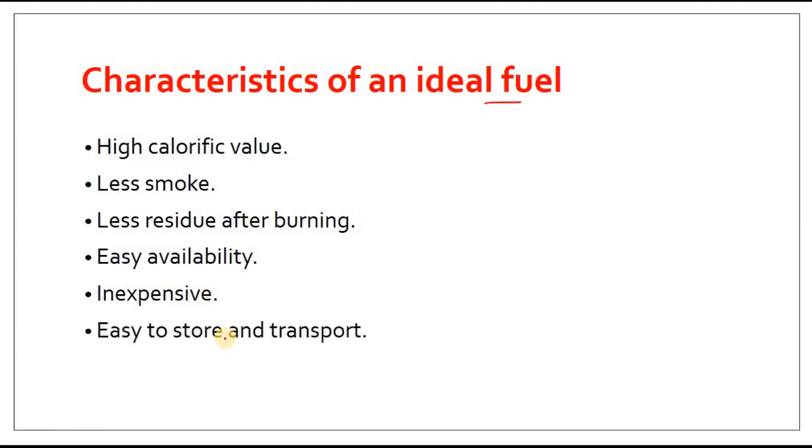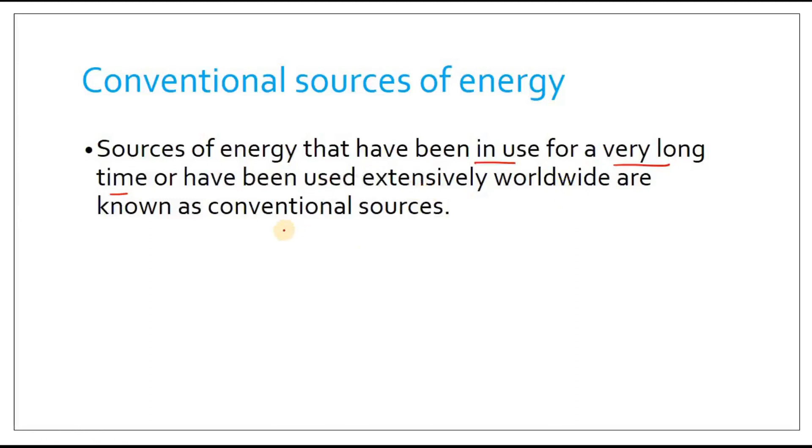Now let us see about some conventional energy sources. Let us talk of the conventional sources of energy, the old or traditional energy sources. The sources of energy that have been in use for a very long time or have been used extensively worldwide are known as the conventional energy sources.

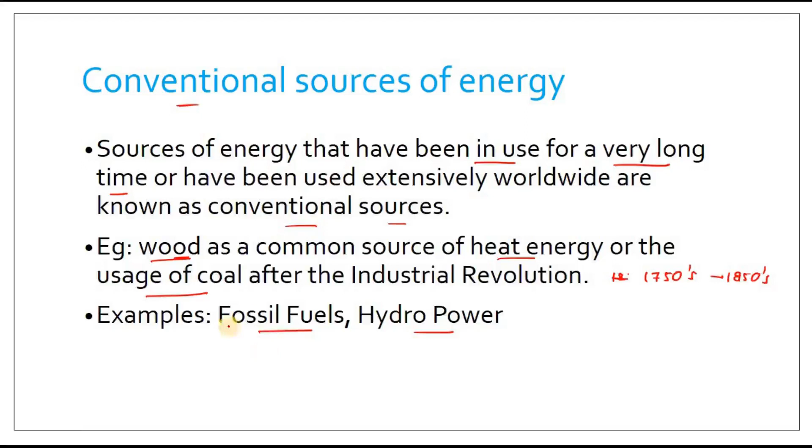For example, wood as a common source of heat energy, or the use of coal after the industrial revolution, which started in the 1750s and reached its peak after the 1850s. Coal is still used, and wood has been used for thousands of years, so these are conventional energy sources. Fossil fuels and hydropower are examples of conventional energy sources. We will see about some of them in this topic.

Let us start with fossil fuels. Fossil fuels are the remains of prehistoric animals and plants which were buried under the earth millions of years ago.

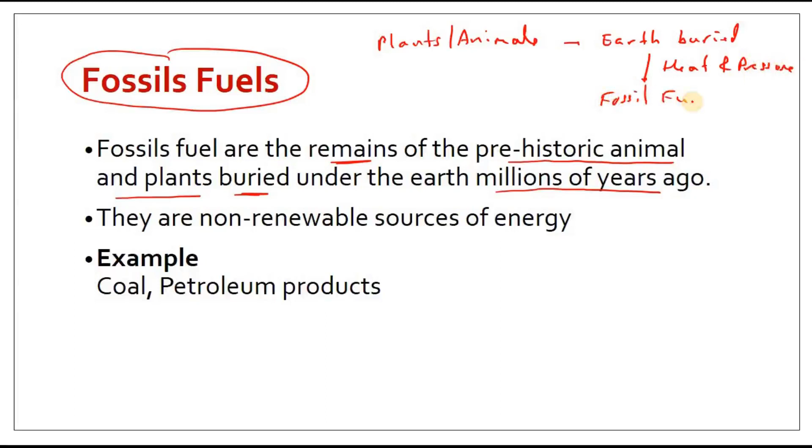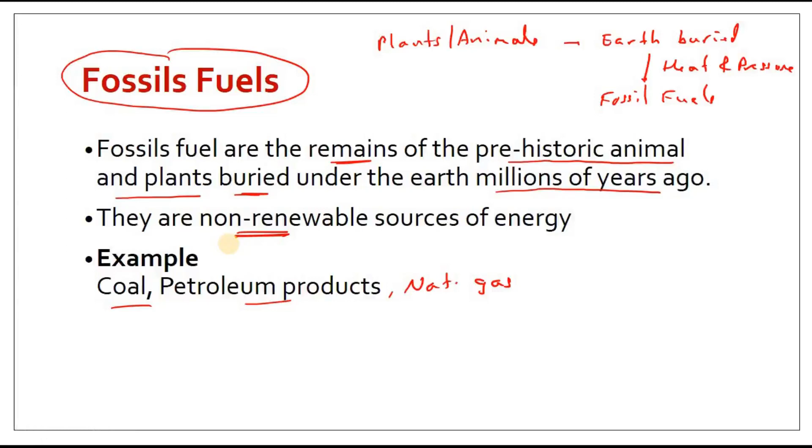So coal, petroleum products, and even natural gas are examples of fossil fuels. All these are non-renewable energy sources because once they are finished, it is very hard to get them again. In the previous video I showed you that coal takes a million years to make, and 1 kilo of coal can be burnt in just 10 minutes. So they are non-renewable energy sources.

What are the advantages and disadvantages of these sources? Let us talk about fossil fuels, starting with the advantages.

They release a very large amount of energy, which can be obtained very cheaply. This is a characteristic of a good fuel - it should be cheap and produce a large amount of energy. Also, transporting them from one place to another is easy.

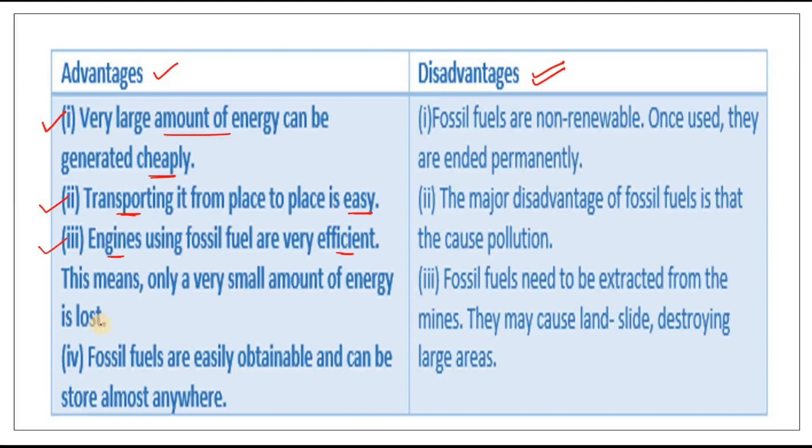Third, engines using fossil fuels are efficient, meaning only a very small amount of energy is lost. Fourth, fossil fuels are easily obtainable and can be stored almost everywhere.

So you see, out of the characteristics of ideal fuels which we saw, fossil fuels tick many boxes, but still we know that they are not so good to use. We have to find alternatives. Why? Let's see some disadvantages.

Number one, they are non-renewable, meaning once used they are ended permanently - that's a big problem, they will end in the next 20-30 years. Second, the major disadvantage of fossil fuels is that they cause pollution. That is the main problem, right? Pollution is the main cause of concern from the use of fossil fuels.

Fossil fuels need to be extracted from mines, which may cause landslides, destroying large areas. But the main problem is that the use of fossil fuels causes pollution, and number two, they are non-renewable, so they are limited. Once finished, we will not get them again.

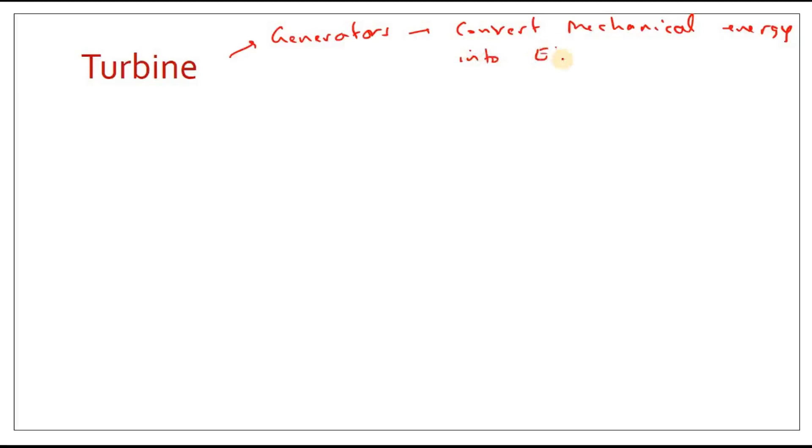Now, how do we get energy from fossil fuels or most things? It is by the generator. Generators convert mechanical energy into electrical energy - this is how electricity is generated, through the conversion of mechanical energy into electrical energy. And the machine which helps in doing this is called a turbine.

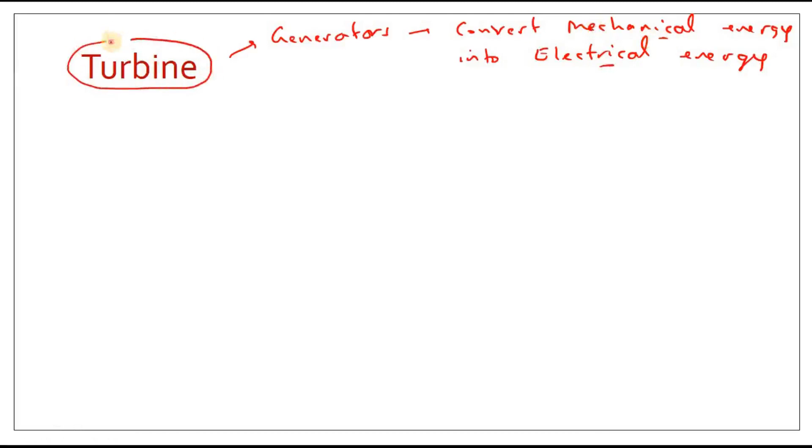So a turbine is a device, a machine that rotates. It rotates when steam, water or wind falls on its blades. The turbine turns the shaft of the electrical generator and electricity is produced.

We will learn about this in another lesson of science. Electromagnetic - mechanical energy can be converted into electrical energy. That's called electromagnetic induction. We'll learn that in another lesson of science this year.

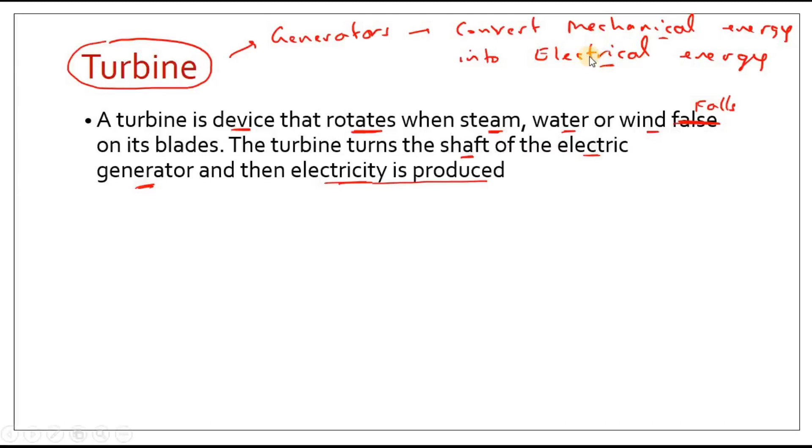So look at this, this is a nice example. We take water in a pressure cooker and we heat it, we apply heat, so water will turn into steam. Now steam occupies more volume compared to water, so this extra volume of the steam will go with pressure. This volume of steam will escape.

We fix a pipe at the top of the pressure cooker, and steam will pass out of this pipe with pressure. This pressurized steam is coming out, and what we are doing is we have fixed a tennis ball fitted with metal sheets up here. So the steam hits the metal sheets and the ball will rotate, and this rotational movement of the ball is joined to a dynamo.

A dynamo is a generator which will convert mechanical energy - this movement, this rotation of the blade - this is mechanical energy. It is being converted into electric energy, see, and the bulb will now light up, meaning electricity has been generated. So this mechanical energy converted into electric energy, and the electric energy converts into light energy by the bulb, and the bulb lights up.

So this is how a dynamo, a turbine would normally work. This is the turbine - this device up here would be a turbine, which is connected to a generator, which will make electricity.

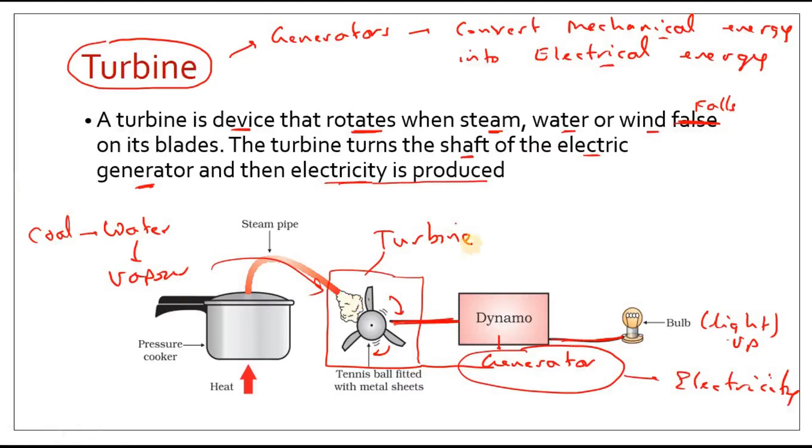The same process works in wind energy, in water energy, even in thermal energy. When you burn coal, water heats, water converts into water vapor, and the same thing - water vapor does work. You use wind energy, the wind energy will turn the turbine and convert into electricity. Moving water, flowing water of a dam will turn the turbine and convert into electric energy. You see, the principle is the same.

So let us see how a thermal power plant operates. Thermal power plants burn fossil fuels - they burn coal, which heats up the water to produce steam. So water converts into steam, and steam is used in the turbine to generate electricity, just what I told you a little earlier. So the term thermal power plant is used since fuel is burnt to produce heat energy, which is converted into electrical energy.

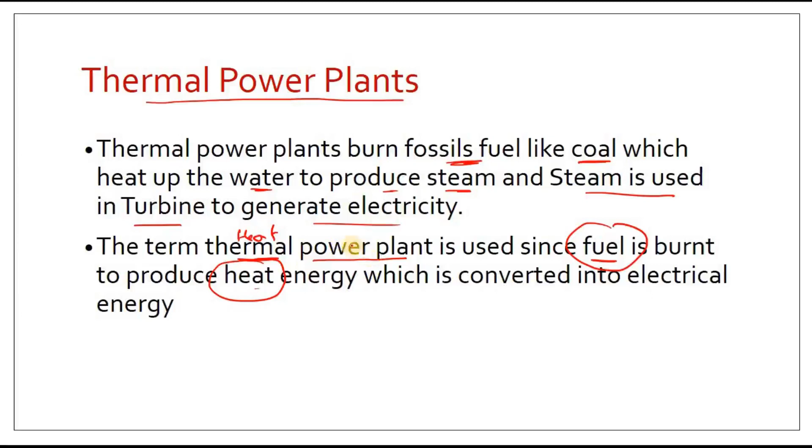So thermal means heat. We burn the fuel, we first produce heat energy. Heat energy will now do mechanical work of turning the turbine, which again the generator will turn into electrical energy.

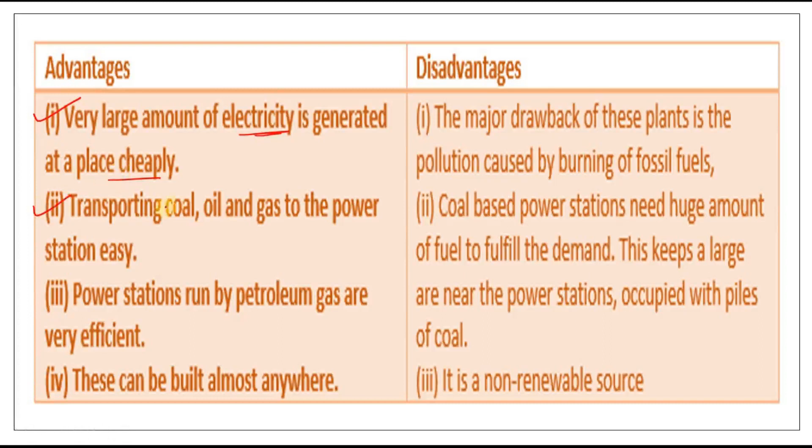Now, what is the advantage of the thermal power plant? A very large amount of electricity is produced at cheap rates. It's the same advantage of using fossil fuel that is the advantage of thermal power plant. Transportation of coal, oil and gas to the power station is easy. Power stations run by petroleum gas are very efficient, and we can build them almost everywhere, because we only have to transport the raw material - the coal or oil or gas.

Still, they have a major disadvantage. The first disadvantage is that they cause pollution because they burn fossil fuels. The second disadvantage is that coal-based power stations need huge amounts of fuel to fulfill the demand. This keeps a large area near the power station occupied with piles of coal, and it's a non-renewable energy source.

So whatever were the disadvantages of fossil fuels, the same are disadvantages of thermal power plants. But the only thing right now is that we can obtain it a little cheaply compared to other sources of energy. But this is a matter of time only.

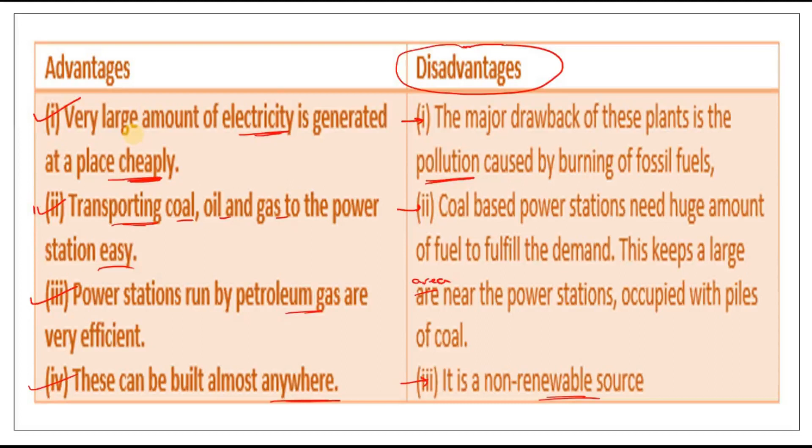In the future, we are going to use modern techniques of energy generation. The non-conventional sources we are going to use more and more, and they'll be quite advantageous to us. They'll be quite cheap in the future. Any new technology is expensive at the inception. Over a period of time, new discoveries occur, new technology develops, and the technology becomes cheaper.

Okay, hydropower plant also we finish in this video. Hydropower plants means plants which work with water energy. Hydro means water. So in hydropower plants, the kinetic energy of the flowing water or the potential energy of the water at height is used to turn the turbine and generate electricity.

Very easy concept. So to produce this hydel electricity - hydel or hydro, this is the same thing, hydel means hydro only - high-rise dams are constructed on the river to obstruct the flow of water and thereby collect water in large reservoirs, in large lakes, and then the water is allowed to flow down.

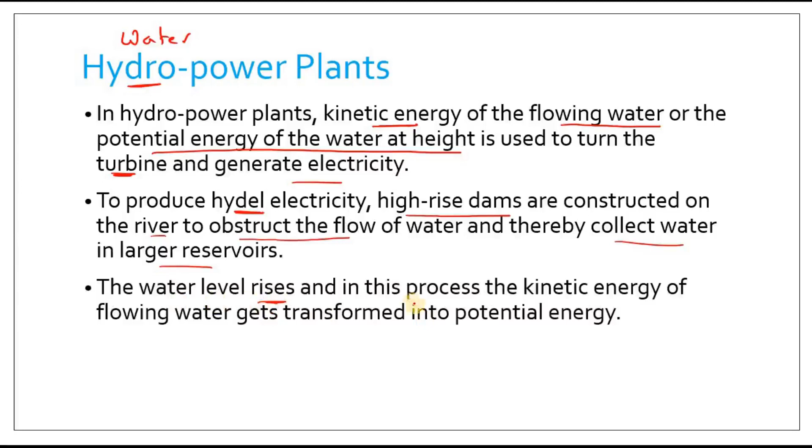The water level now will rise, and in this process, the kinetic energy of water gets transformed into potential energy of flowing water.

Why I'm saying this is that if I have a dam and a lot of water is collected in the dam up here, the water is collected here, the river is here. This water, because of the height, will have potential energy. Now when the water is released down through the turbine, it will flow. This flowing water is now kinetic energy, and this will do work.

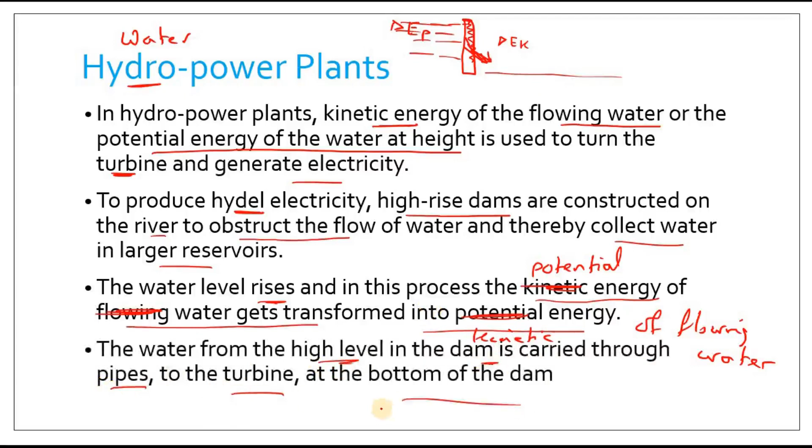I'll show you by the diagram. The water from the high level in the dam is carried through pipes to the turbine at the bottom of the dam. See this example - this is the reservoir, this is the dam, the wall of the dam, this is the lake, the reservoir, and this is the sluice gates where we are putting filters so that impurities, rock particles and other particles don't come into the turbine where the turbine will get spoiled. The water is now allowed to enter into this channel at high speed.

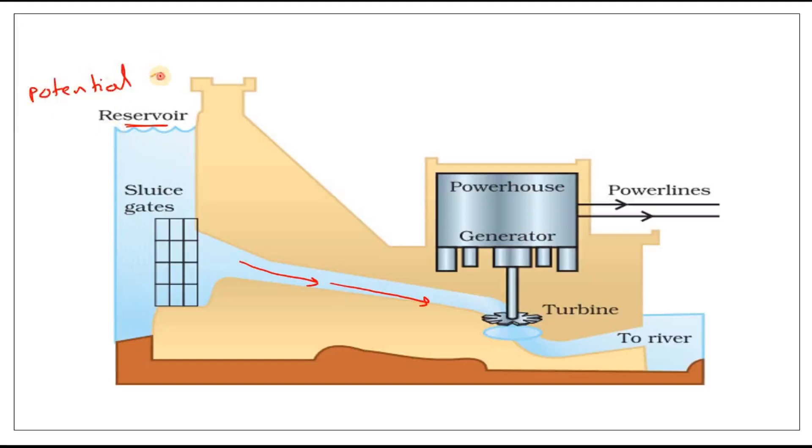Because this is the potential energy - water at height has a lot of potential energy due to the height. In 9th standard we learned potential energy is equal to mgh, where h stands for height. Due to the height of the water, it has gained energy.

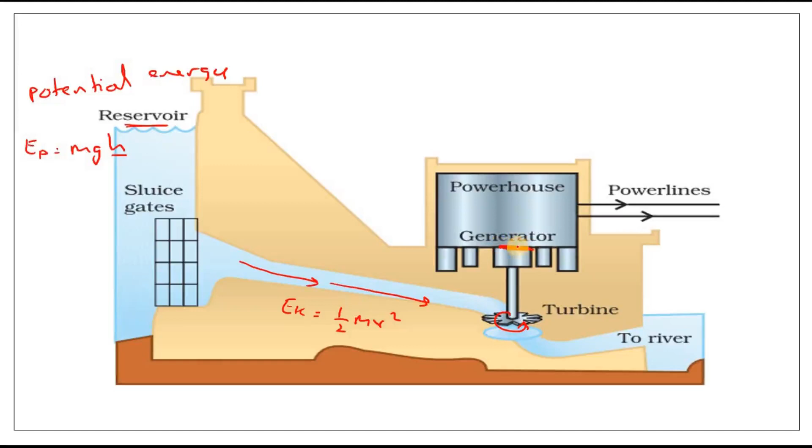Then when the water is allowed to flow, it converts into kinetic energy. Kinetic energy formula is half m into v square. So the speed of the flowing water is kinetic energy, and this is going to turn the turbine, which is connected to a generator that generates electricity, and this electricity runs to the power lines and we get electricity. Then the excess water is passed to the river, and from the river into our fields.

So we use this water also. The dam reservoir - this is the dam - collects and stops the water, forming a reservoir where the water now has potential energy. The potential energy of the water in the dam is used to generate kinetic energy, which moves the turbine, which in turn generates electricity by the generator.

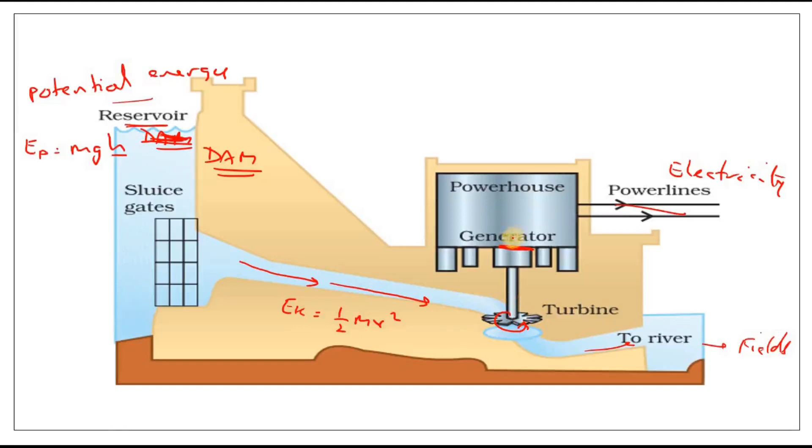So the advantage of hydroelectricity is that water required for running these stations involves no cost. Water, though free, of course comes from rainfall, so it's a renewable source because rainfall will come and water will collect every year. There's no pollution by these stations. It helps in irrigation for agriculture, and it also helps to control floods. So it is very advantageous compared to thermal.

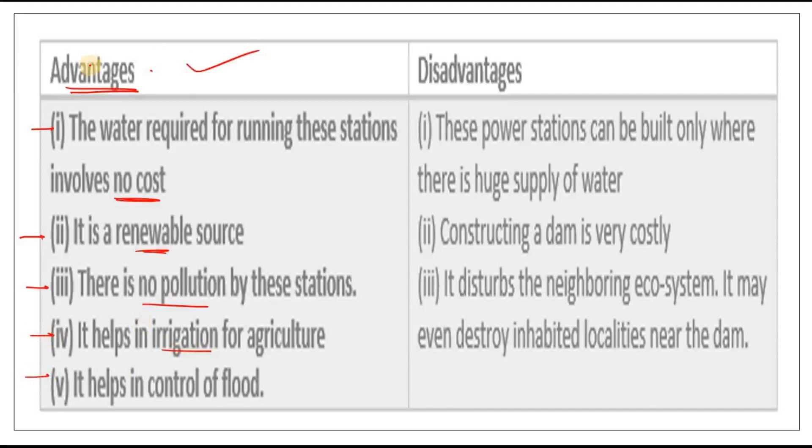This is a good source, but it still has disadvantages. They cannot be built anywhere - they can be built only where there is a huge supply of water or where a dam can be constructed. Constructing a dam can be very costly, and it also disturbs the ecosystem. It may destroy inhabited localities near the dam, so plant, animal and even human life are disrupted because of dams. That is why dams are not a very favorable means of getting energy, but still they are a source of clean energy.